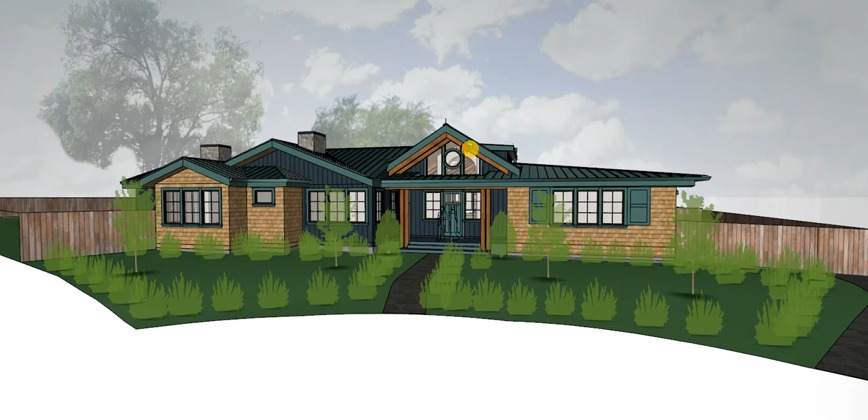Hey guys, thanks for the great meeting just now and for the meeting that we had last week to go over your feedback on those initial massing studies. I'm really happy with this latest iteration of study 5 that you liked, the one that had the steeply pitched gable, not quite the A-frame, steeply pitched gable taller than 18 feet. So yes, this will trigger a planning commission review, but so be it. I think it's a very attractive design. I hope the planning department will appreciate it as much as I do, and as much as I hope you guys do. So what we're looking at here is a simplified version of what we had before.

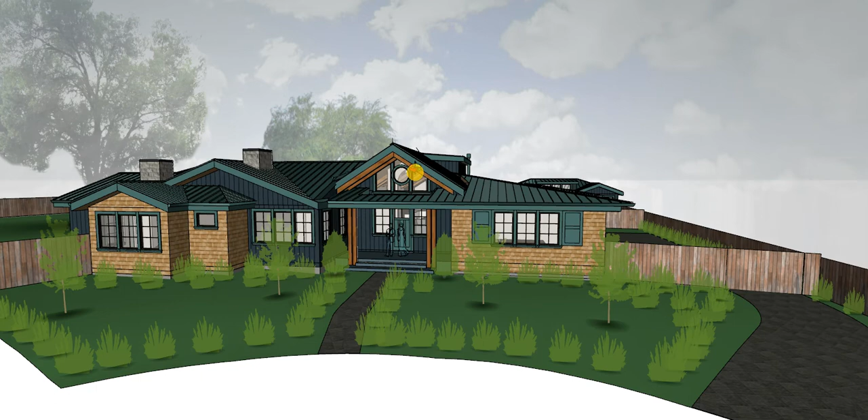So instead of there being 6 different gable dormers for the great room, 3 on each side of the main ridge, we're now looking at just a simple shed dormer on both sides with 4 clerestory windows high up, bringing a lot of light into the middle of the great room, at the dining area and the edge of the seating area. I really like this. I think it's pretty handsome, but we did have to lower the height a little bit to account for the taller than 15-foot interior height double count that we're going to have to do for certain areas of this great room. But I still think it's attractive.

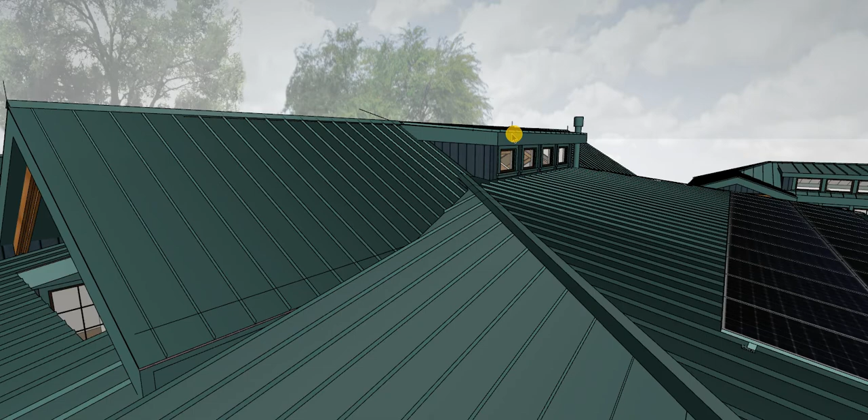We're looking at a mix of roof slopes here of 7.5 and 12, 4.5 and 12, and 2 and 12, with a little bit of 1 and 12 thrown into the mix too. That 1 and 12 here is just to make sure that we have enough wall height to fit an attractive looking transom in without interfering with the 2 and 12 main slope here. This could be played around with a little bit. This could be flattened a little bit more too.

In fact, maybe going with a flatter 1 or 1.5 and 12 roof pitch for the garage would help minimize or mitigate the penalty we're going to have for tilting towards the north on the solar panel right here. That's probably something I could continue to iterate on. Regardless, though, I'm still really happy with the overall look, and those are the main pitches that we're using, the roof pitches. Let's see here.

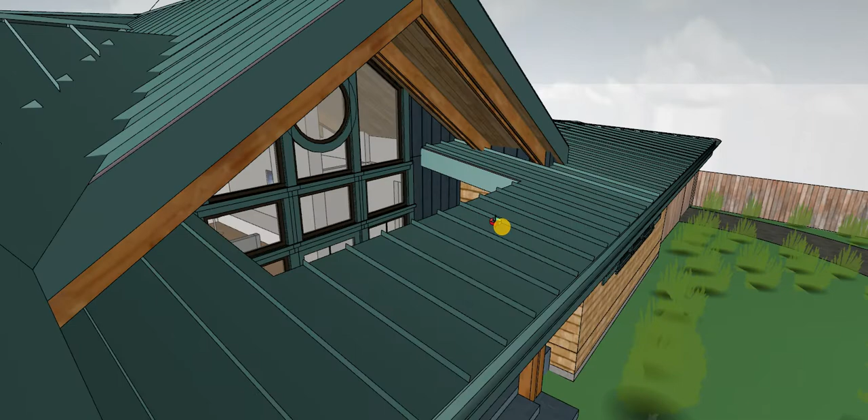There is the cutout at the front porch, which allows for this repeated motif of a window design without being interrupted by the roof plane. And I think this looks great as you're coming in. And you look up through this opening, you start to see the wood ceiling that's a part of the great room. And if we go through the door, and we're in the great room, and we look back, I think it's still appreciated even here as well.

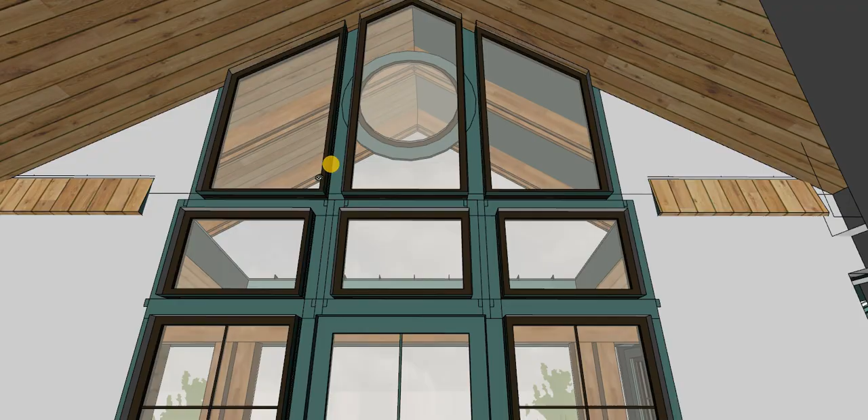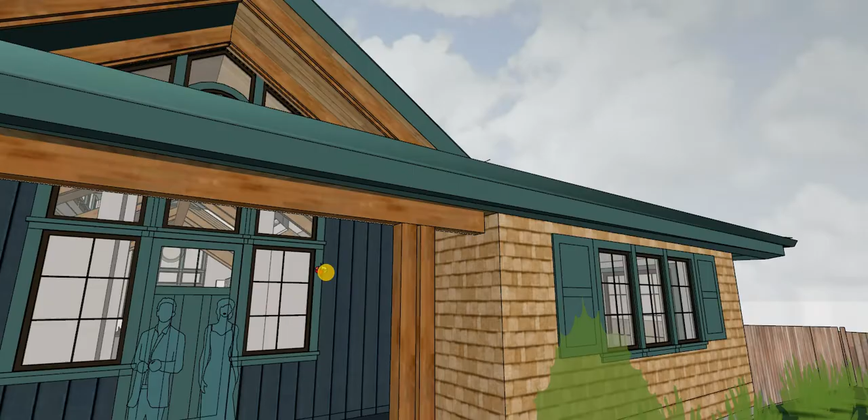When you're walking towards your front door, and you look up through this opening, through this area that's still protected. The roof overhang's still coming up over here. But I think that's really, really nice. A nice special treatment there. And why do we still want this roof here? This is to help tie in with the neighborhood. Your neighborhood is predominantly these long linear eave lines.

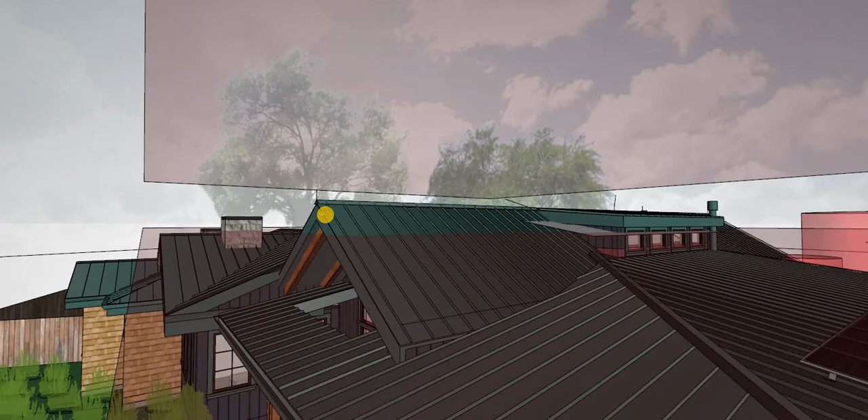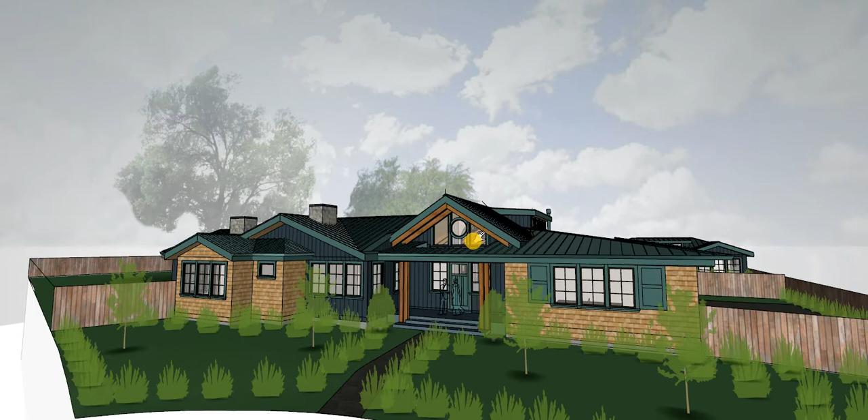I think this is a really important line to incorporate into your home design to help mitigate the added height here. We go 2.5 feet above this 18-foot height limit. That's what's going to trigger the Planning Commission review. But I think by bringing it back so far and having this long, low roof line soften this will help a lot. Plus we're, I think, offering a very special view here.

This interior wall, this gray element, it's just a placeholder for now, but I do think this could be expressed very, very specially, very beautifully. But we'll play on that while the Planning Commission review is underway, rather than focusing on that element, because the planning department's not going to care what happens on the inside. Even though it would be visible, it's really not part of their purview. They're going to be talking more about, is this massive element looming over any of your neighbors? And no, I don't think that's the case for us.

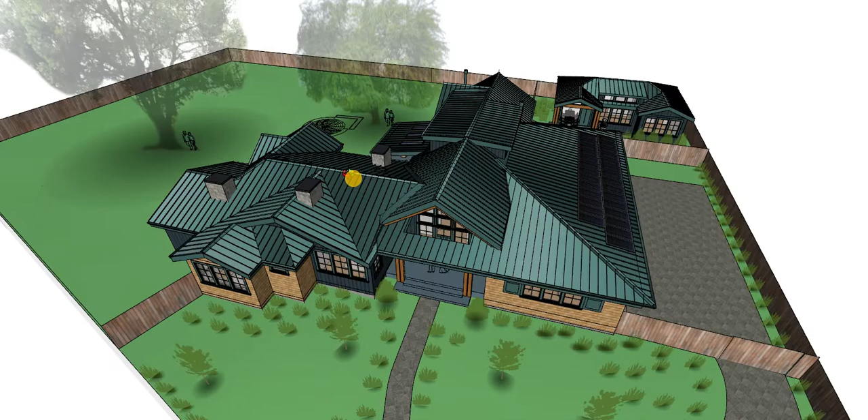As we turn the corner here, we're seeing that we've got a very limited material palette. We're really just talking about metal roofing for the entire house. It's a very clean roof. There are a lot of roof planes, but I've combined as many as I could logically and practically. I'll be happy to review that with you in more detail if you'd like. The wall palette is really, I think, just two materials. Just the shingle siding and the board and batten siding, painted black. So no more mixes of black and blue, now it's just black.

Vertical board and batten siding made out of fiber cement, and a similar fiber cement, but a shingle siding, and more of a warmer tone wood look. So one of the things I tried to do is with every elevation, I wanted the elevation to be bookended by low elements like the bedroom wing or the flex room wing, these low elements in the stain grade material

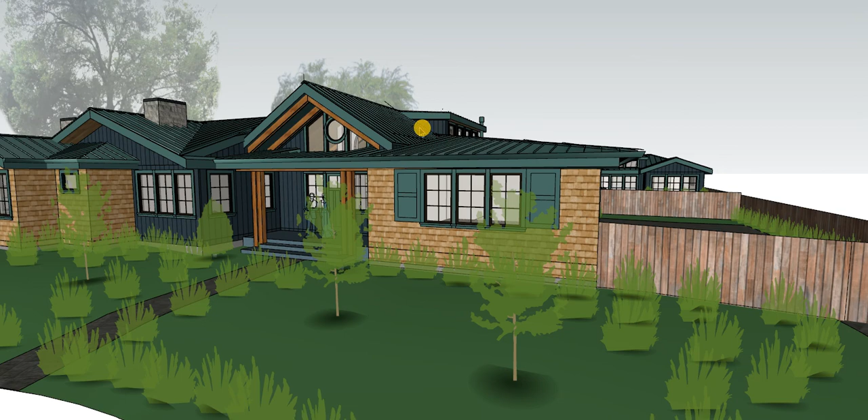that has more texture to it, and you can get up closer to it. Whereas the elements that are far away or tall, or that I want to recede from the eye line a little bit, like the shed dormer siding or the tall wall of the great room, that is meant to be the darker black painted fiber cement material that draws more attention to these lower elements.

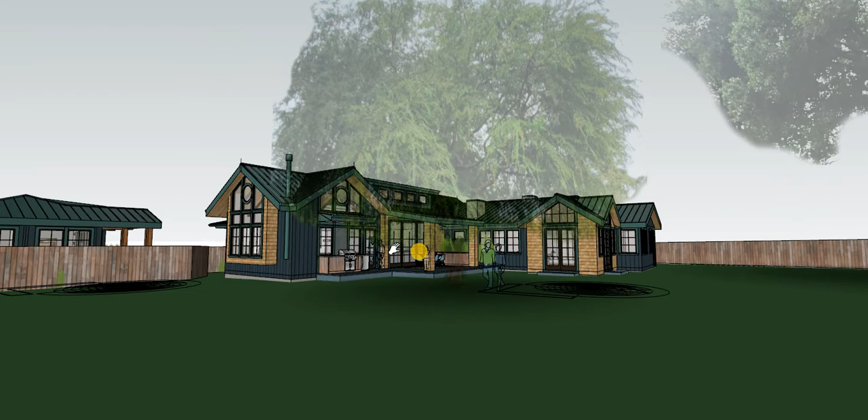So that's sort of the appeal happening at every elevation, being bookended, I should say, by lower elements or smaller elements of the shingle siding. So that's sort of a repeated motif that I've relied on for how I've applied the materials.

So as we turn the corner here for the garage, ignore this line for now. I've said, hey, I want the doors to be centered on the wall in this flex room, and I want the doors to be looking like they're supposed to be centered on something. So let's make sure that the material change happens here, even though there's no change in the wall plane here. We've changed the material. Now this door appears centered from the exterior as well. And this door grouping also appears centered within these bands of fiber cement siding in this case.

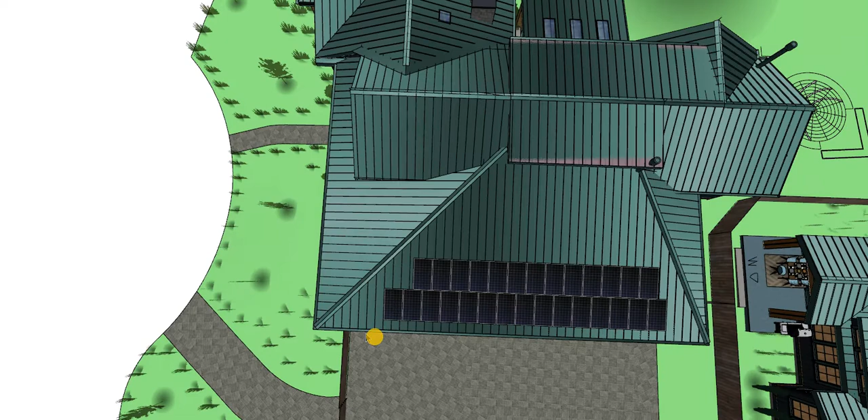So one interesting thing I did here with the roof slopes is these two roof planes slope 2 and 12 and create a 45-degree hip line. This roof plane, though, I didn't want to slope that back at 2 and 12 again, because the 45-degree roof plane kind of comes to a bit of a point right here, and I didn't feel that was very attractive.

So I said, well, let's try the same 4.5 and 12 roof slope I'm using on the bedroom here, and lo and behold, that lands us perfectly in line with the width of the shed dormer for those 4 windows. I'm like, oh, that's kind of fortuitous. I think that's kind of perfect. I think it looks pretty attractive to sort of be the end cap for the mudroom here.

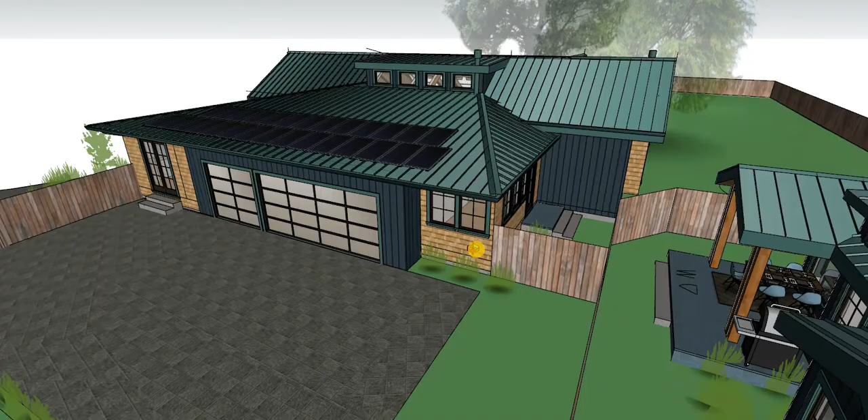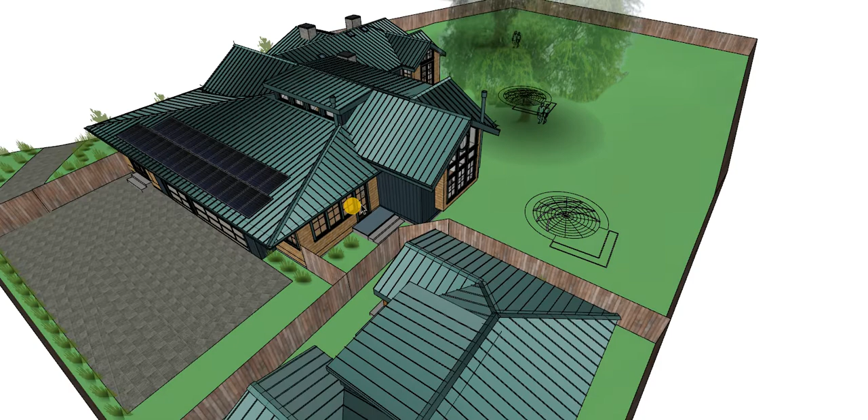You're seeing the ADU now mocked up as well. I'm showing some idea for what fences could be like if you ever wanted to rent out the ADU, but partition more of the fence area for yourself. So there'd be a gate here so you could get into your mudroom yard with access through this little kitty corner or chamfered cut right there to get past the corner of the great room into the backyard area.

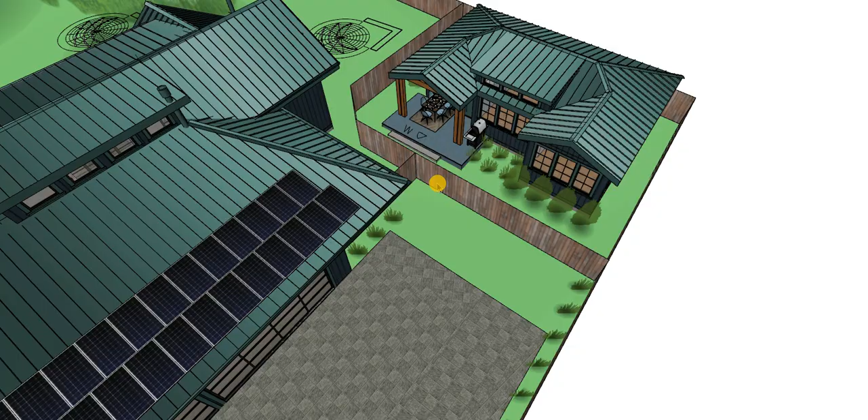But this leaves some side area for the ADU. They would access their ADU through a gate right here perhaps, and then open right into their door. But I don't think you're going to want to have that fence built right away, so it's going to feel more open like this. So let's take a look at it like that instead. I think the ADU looks nice.

We asked in the meeting whether or not this height increase with this shed dormer was necessary. Certainly not necessary, but I do think it's a nice tie-in with what's happening at the great room for the main house. And so I'd say, yeah, let's go for it. Yeah, it's 3 more windows. There's costs for the windows and the installation and flashing of them, but it's a nominal increase for, I think, a lot of added benefit.

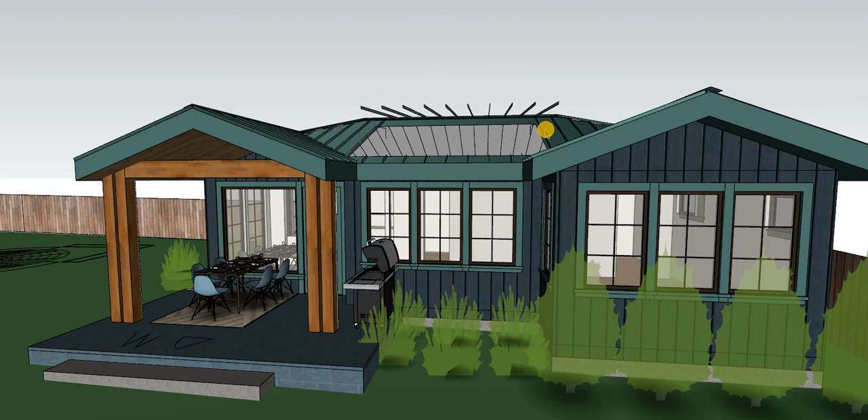Without it, it's okay. You can imagine what that'd be like closed in. It's a bit too plain. I like the balance. I like seeing these 2 gables with this element in the center, and then dressing up this gable with the posts to draw the eye this way to say, yeah, this is where the entrance is for the ADU.

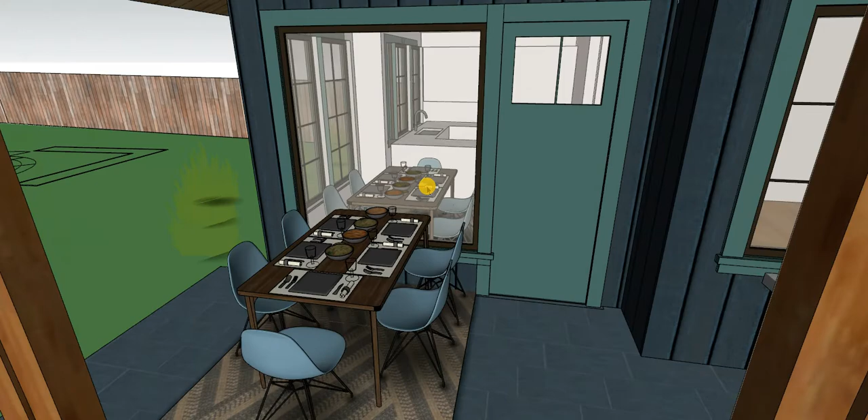I'm really interested to hear your thoughts on how successful you think this feels as just a furniture element. I mean, certainly we could do some built-in benches around this tall, large, fixed window to create that indoor-outdoor feel and that really awesome inspiration image you shared. But I think starting off as furniture pieces does seem to work, in my opinion.

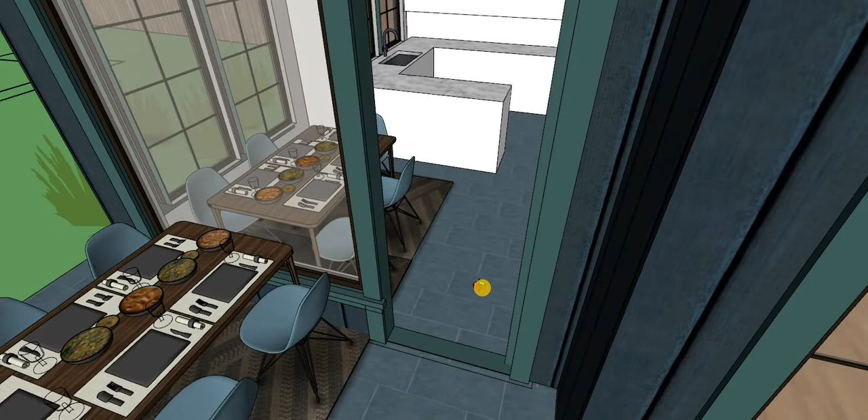Especially since I changed the way the doors open. So now we'll see the door swing open this way into this furniture zone, into this empty area. And this would be the entry area. So we come in, we're blocked from the family room a little bit, not much, the living room a little bit. But I think that's the way to do it.

That way also, if you're having the party here, you can leave this door open. And now you've got sort of a conversation zone. This could be a double casement that would open up as well to create a very large air opening with really just one piece of glass separating you guys from what is otherwise very open air.

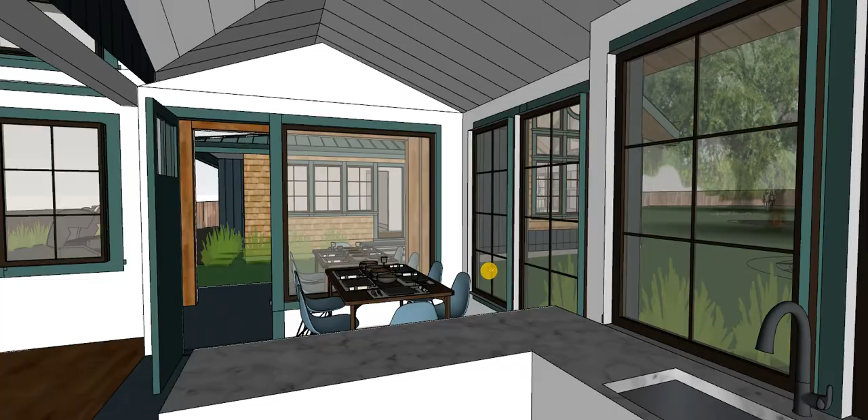Let's get to the door here. So I've stuck with the bay window pop-out happening at the kitchen sink, but I've taken that all the way up to the roof. And to be honest, this is the first place I developed the design. This is where I created the motif.

And then again, just like I did with the A-frame house I was going on and on about last week, I copied that design and the roof form onto the cooktop wall, and then just modified it slightly to make the cooktop wall work while still allowing and celebrating the amazing view and connection to this mature elm tree. You're gonna be right under that canopy. I'm so excited about this, and it works really well. It works really well as an outdoor cook area as well.

Blocking off this ribbon of windows here at the cooktop side allows for there to be a little low cover element for the outdoor kitchen, which I think is cute. It's not necessary, but it's cute. I don't think you need to worry about mechanically ventilating this cooktop. You don't need to incorporate a hood here, but you could if you wanted to. There's so much open air here, I don't even think that would be necessary, so don't worry about that. But lighting, puck lights, heck yeah. We'll put a couple puck lights, maybe 3 in here, to light up your outdoor kitchen area.

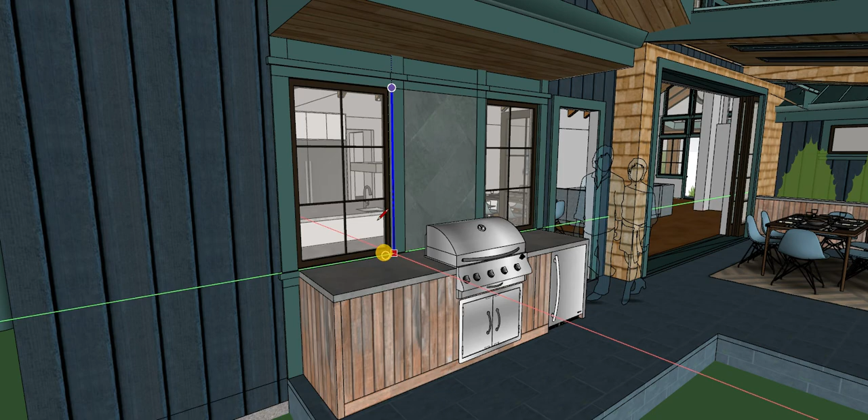Your outdoor kitchen now with casement windows, maybe awning windows? We should think about how we want these windows to operate so that you don't have to worry about clearing the countertop on either side to operate the window. Oh look, it'd be really nice if awning windows could be this big. I don't think it can. I think it's too tall to be an awning window without being super special. 5x3 is the standard window size I'm showing around your house. Typically, I know that's fine as a casement.

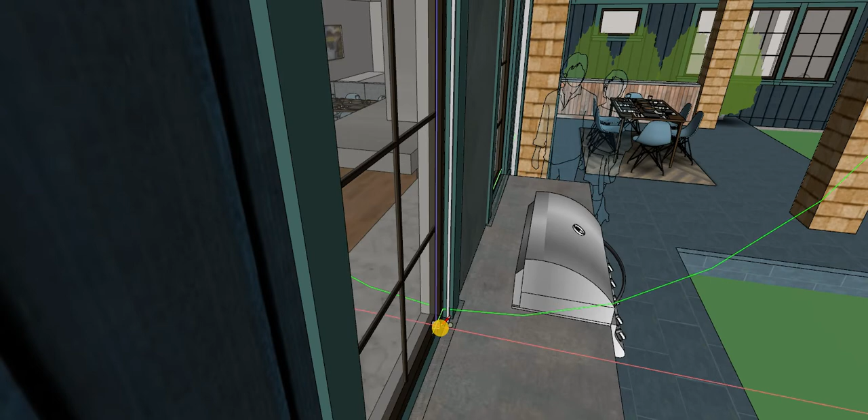I'll double check awning. Either way though, even if it opened up as an awning, we'd have to clear the countertop area here in order to avoid elements being struck in the swing here. If worse came to worse, we could always subdivide this window into a fixed lower panel, and this upper panel could be an awning. Easy peasy. All right. From the inside, I think it's fantastic as well.

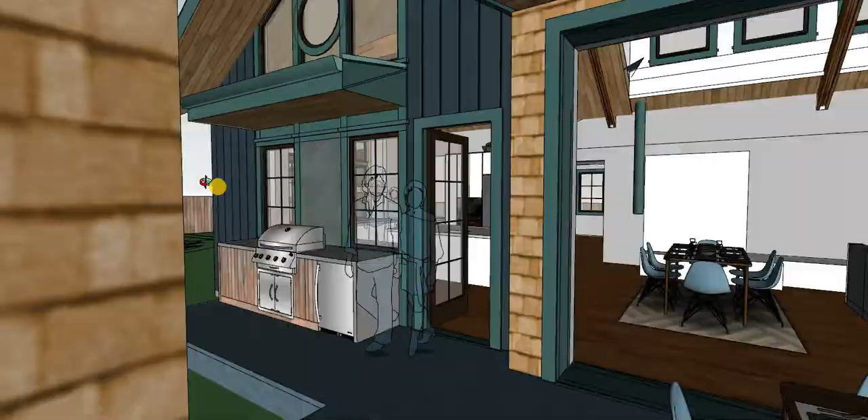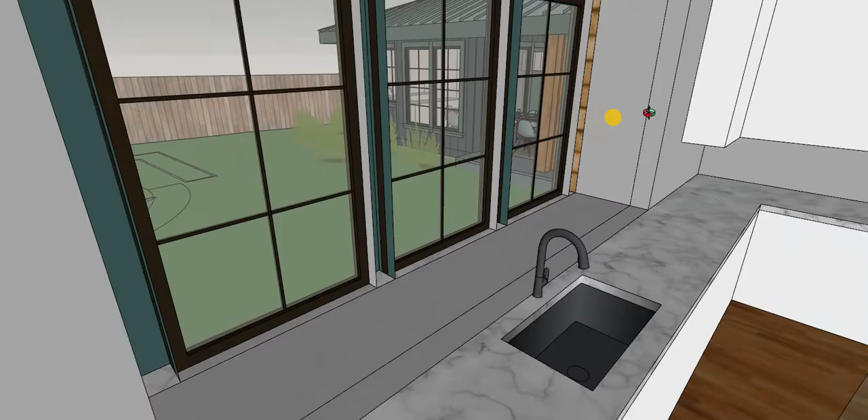Celebrating the view of that tree is something I'm so very excited about. I think your landscape architects should be tasked with putting something special right out here at the property line. Something very special to celebrate at the end here. I know you guys have a strong desire for a garden here. I hope some space can be reserved for a special plant, a tree perhaps, that would be a very great focal point both for the main house great room kitchen, as well as the ADU kitchen.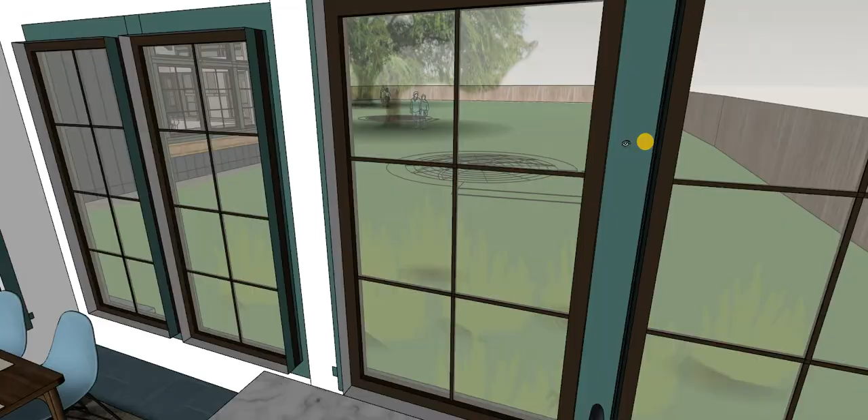I think the ADU kitchen would benefit from seeing something nice in the foreground here as well, although there's a fantastic view of both the elm and the oak tree. This is such a great placement. I'm so very happy with this. Oops, we're underground.

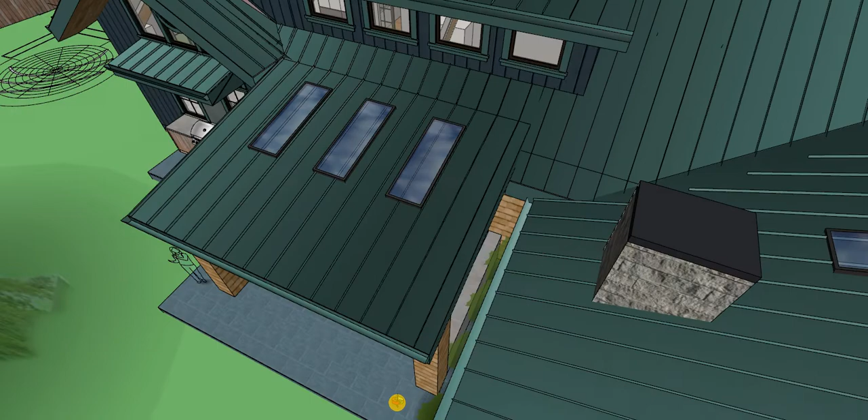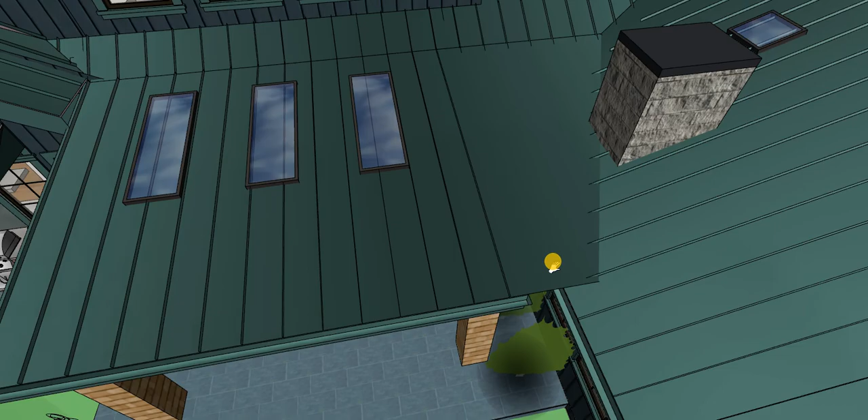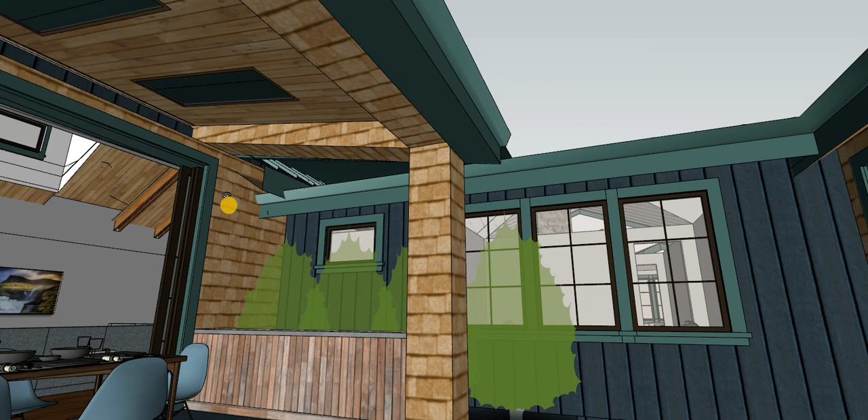We looked at whether or not the covered porch wants to just connect over to the other roof here, and just to quickly mock that up again, while I think it's certainly possible to do this, to close that off, I would just say it's a shame not to have even that little bit of light coming in this way. It's not much. I mean, certainly we're not hurting for natural light here. But I'm just not sure what's really gained by closing this in, other than not having to do another screen, which perhaps doesn't even ever need to be a motorized drop-down screen. This could just be a fixed screen element above this.

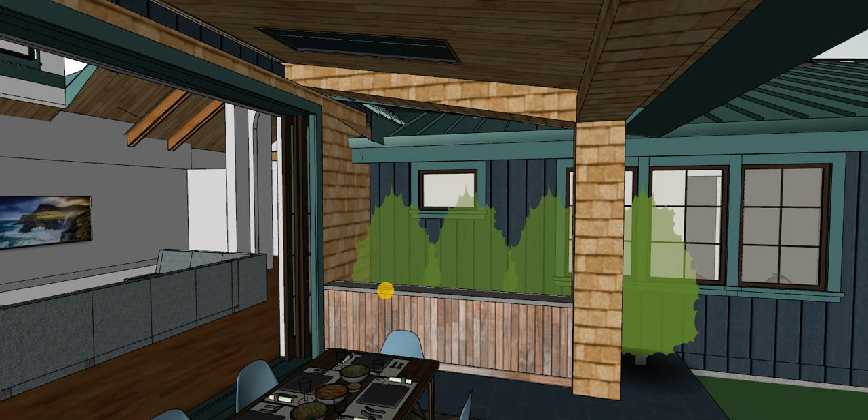It could even be a trellis element, a steel grow medium for some vining plants, like maybe a bougainvillea or a jasmine that is shade tolerant. Could grow up and create sort of a green screen element, but that wouldn't work for your bugs. Never mind, scratch that. That's terrible. It's got to be a screen. Just a solid screen for you guys. But it doesn't have to be motorized, if that's a concern.

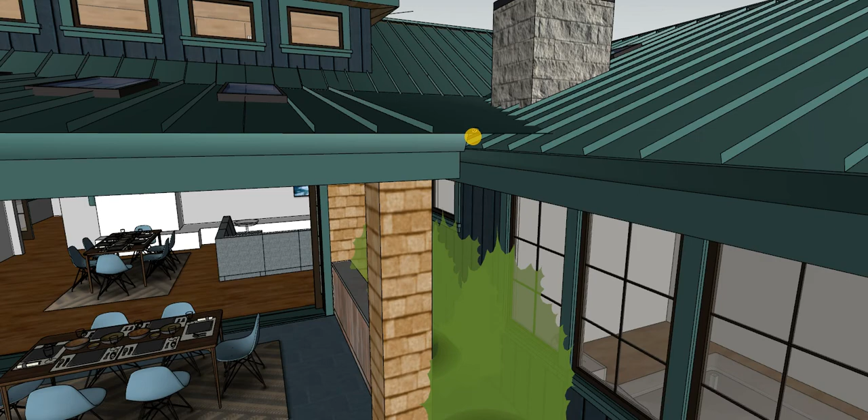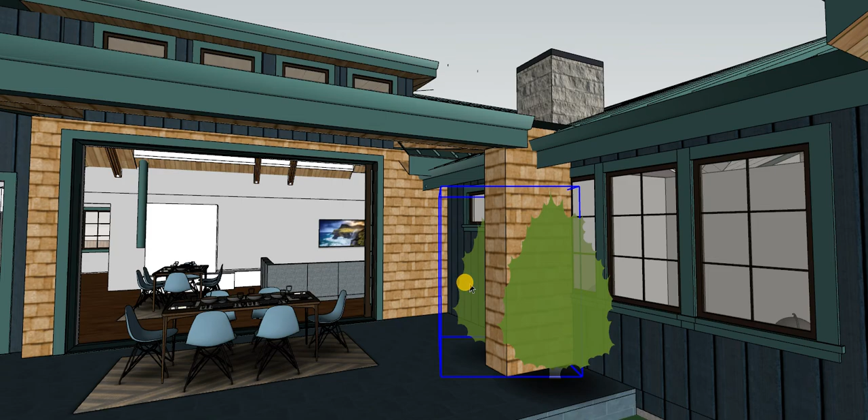Versus closing this element in here and bringing this wall element, more or less taking this element to the wall in order for there to be something for that screen to die against. And you can get rid of this element, get rid of the plants. You could fill this in, so this could still be an area where you have a bit of cabinetry at the end.

That houses elements for outdoor dining. This would be a great place for that. But that's what the intent was with that other narrow element that I had here. This element here. That was the intent there. So that could still persist in this design. I don't know, maybe this is okay.

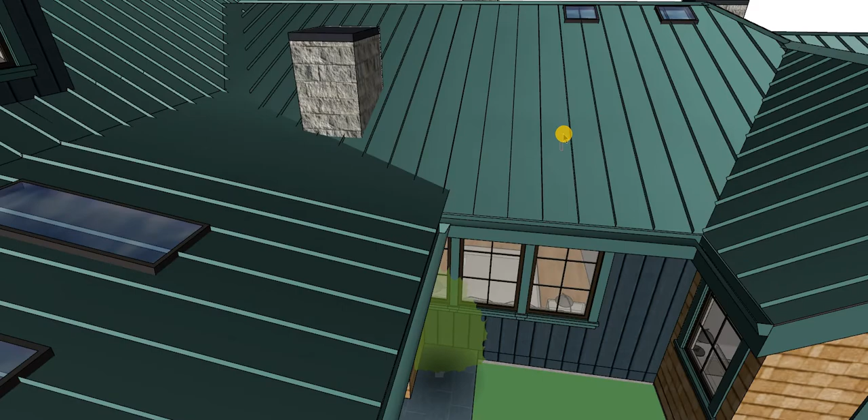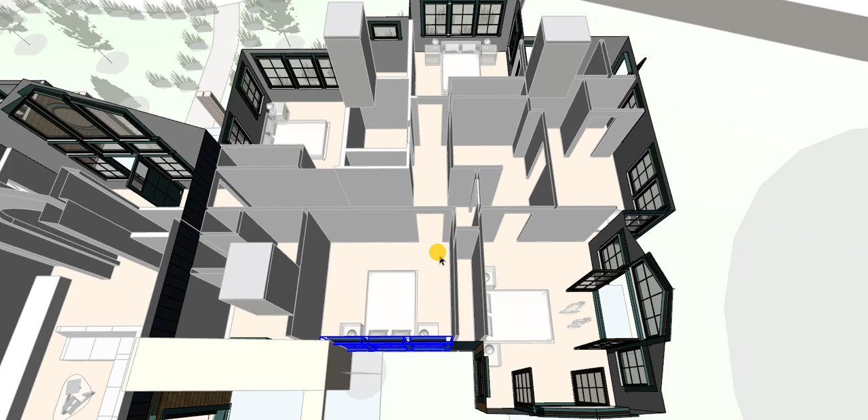Then for these windows here, for this bedroom, maybe what we do is we just say, hey, we're not going to center the windows on the wall. We're going to bias them all the way over here to be in line with the door, so that if this room is ever empty and becomes a space or the door's ever open, coming through the hall, looking through this door into the bedroom, out this window would be really nice. You'll see through all these windows, of course. But I think if we take this element to the wall, we're going to lose a window. That's okay.

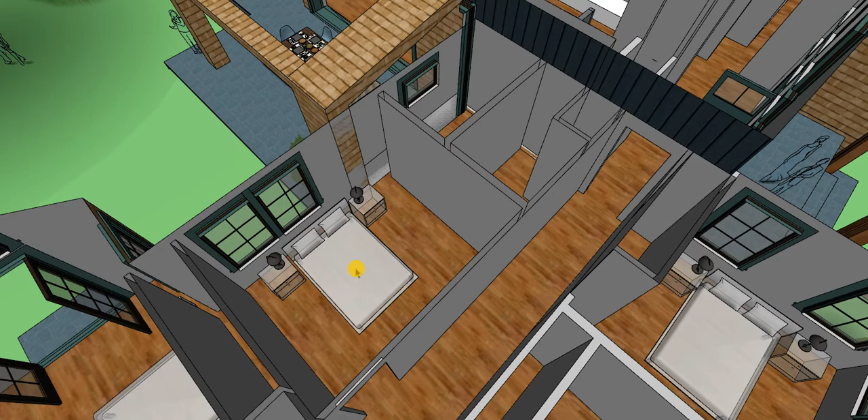This is the door to this bedroom's bathroom, so we don't really want to necessarily rotate the bed. I don't want the bed to be on this wall, for example. Certainly it's a nicer view from bed, but I feel like that's the wrong way to enter a room, against the side of a bed there. That's just my personal opinion though. I do feel like this wants to be the bed wall. And then does it feel a little odd where these windows are placed? Maybe we try to maintain one centered in the room, another one flanking it. I don't know.

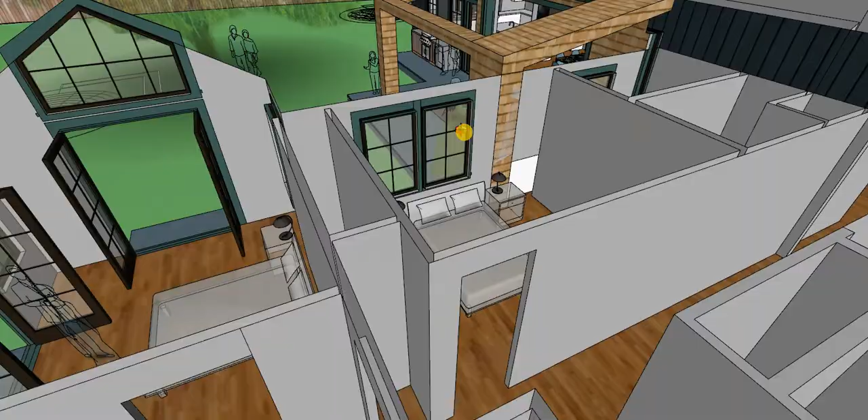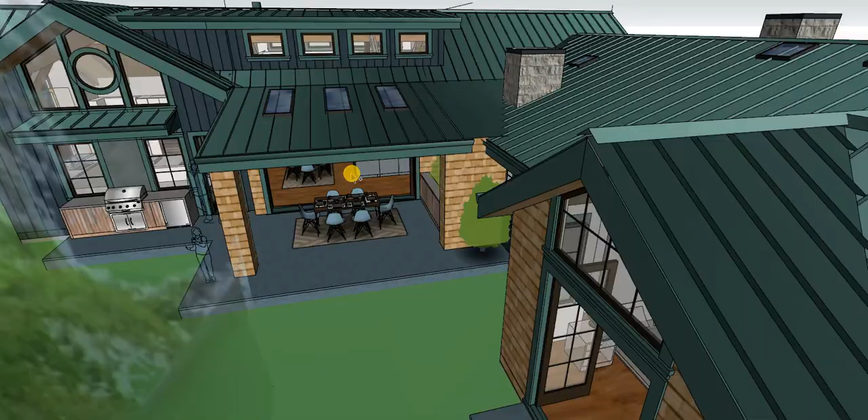It's my personal opinion. It's better to go with the open air space there. To let this be open air. Let these two roofs collide as they will, let their gutters interact here. Keep this as just a simple shed roof with its one gutter at the end here, and then just close this off with one more drop-down curtain or fixed screen, and let these two just be the roll-up kind.

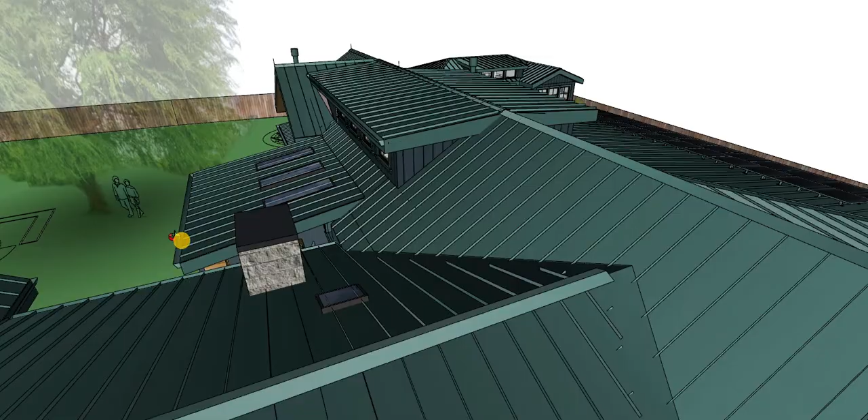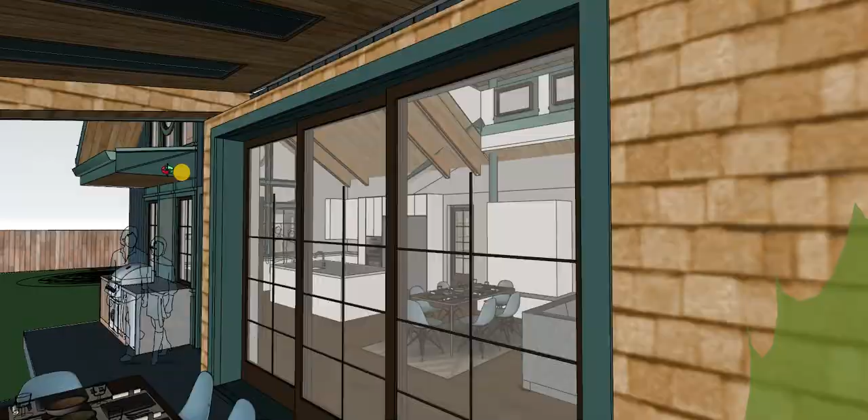One thing worth noting here, looking at this with fresh eyes, I wanted to stretch this shed dormer out to be a little bit larger so that it was meeting this line as well, rather than just being this minimal 4-window element. But I think it might relate better to the doors here. Remember I've stretched these up now from 8 feet up to 10 feet. I don't know. I'm not quite convinced I've got this finalized yet. I want to study this shed a little bit more, how this window array relates to this door. They are in separate planes. The wall for the doors is inset from the wall of this shed by about 18 inches. So they don't have to be exactly the same, but I don't know.

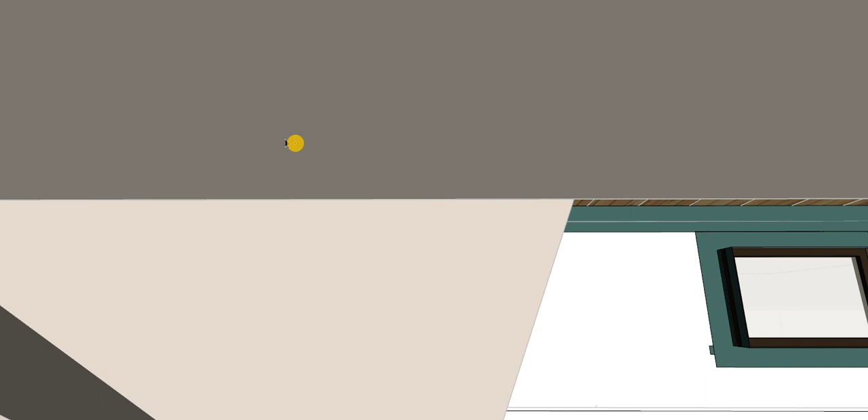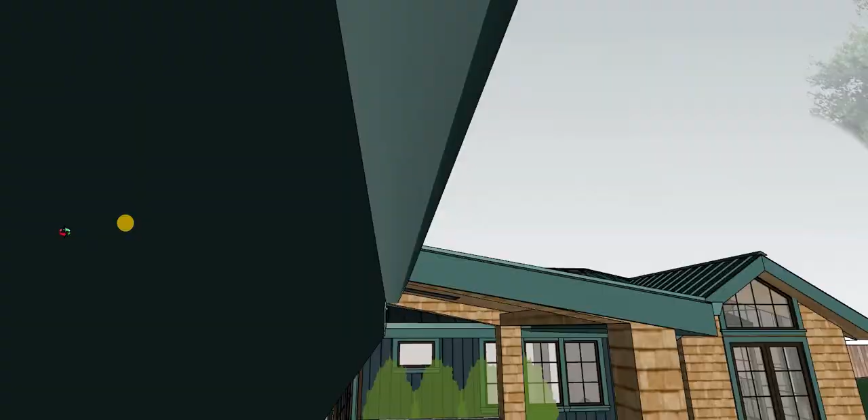Looking at this with fresh eyes again, I think we probably want to see this one go and make these remaining 3 read centered to that. We should then shrink this element up. Excuse me, bear with me. Oh no, am I lost? No, okay. We should shrink this element up by an equivalent amount. Certainly not that much though. Say something like that, okay. Some fixing needs to be done, but I think that's probably better. I can live with that.

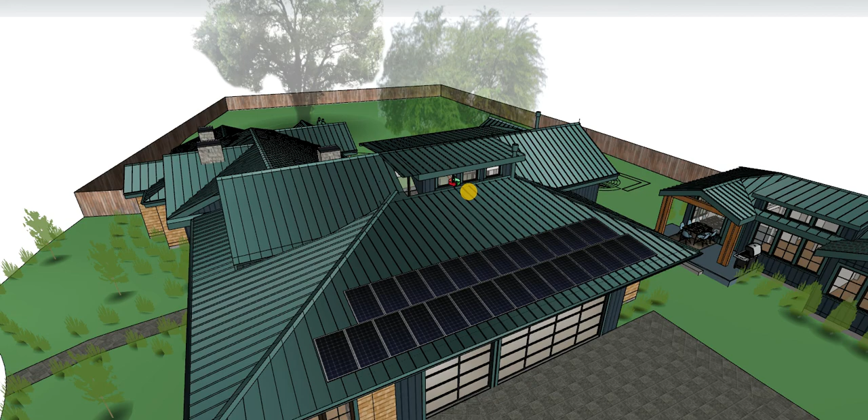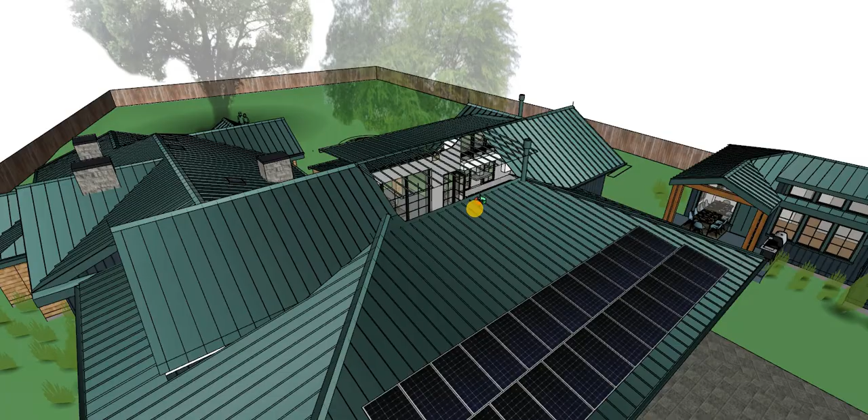This shed dormer on this side is not strictly necessary. We could omit this element and just keep this closed. That might be simpler, all things considered. But I did want to at least start and try by having it be a bit more symmetrical when we first enter that room.

And I think looking up and seeing the 3 windows spaced related to the 3 pocket doors that'll slide over into this pocket here. And then seeing the 3 skylights right there, which are not cutting through that topmost roof plane yet, and looking back and seeing the same 3 here, and maybe the fireplace now takes on a relationship with this leftmost window. I could see that starting to make sense.

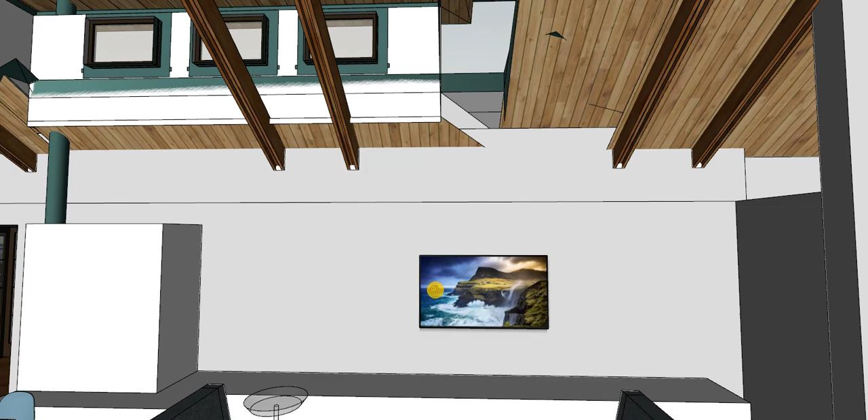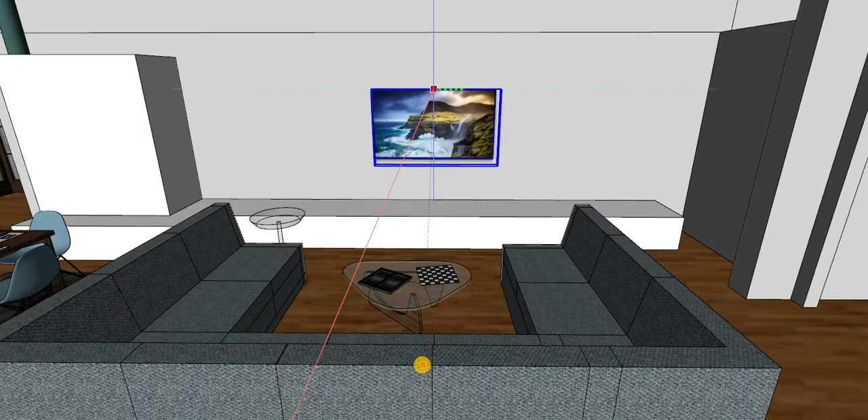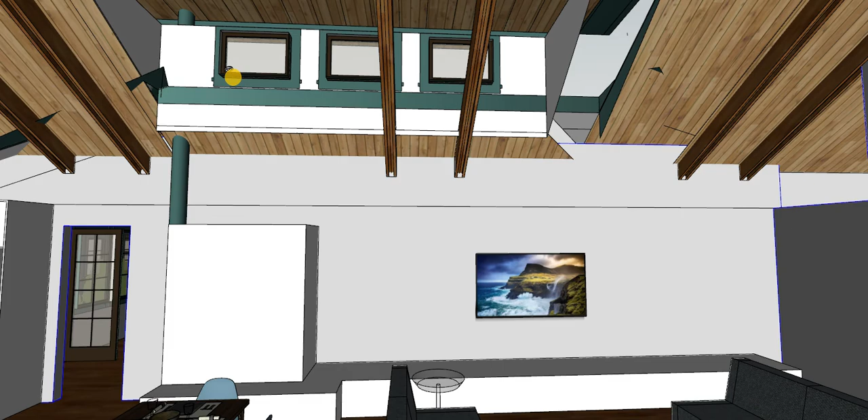And it even gives the TV now, this all has to stretch over, but this gives the TV now a little bit more flexibility maybe, or freedom to scoot over a bit, to maybe be on an edge. I don't know, it still wants to be centered on the furniture. In fact, I should probably show that as such right now. Oh my, how much stuff do I have to go through right now? Bear with me, here we go. I don't know. Might have to look at how the TV and the fireplace relate to this shed dormer above. That might be a dictating element. We'll have to see.

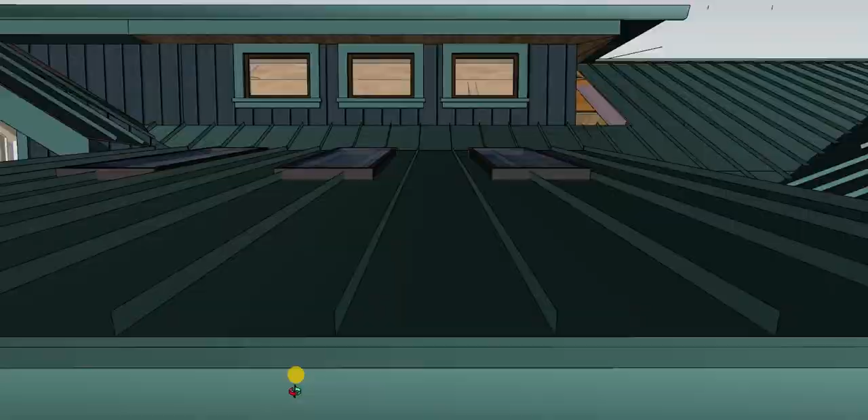Tell you what, I'm going to undo that change just so you can see the cleaner version with the 4 for now. So let's go back to where we were. This will be the version that I'll share with you that you can take a look at. So here's the master bedroom here.

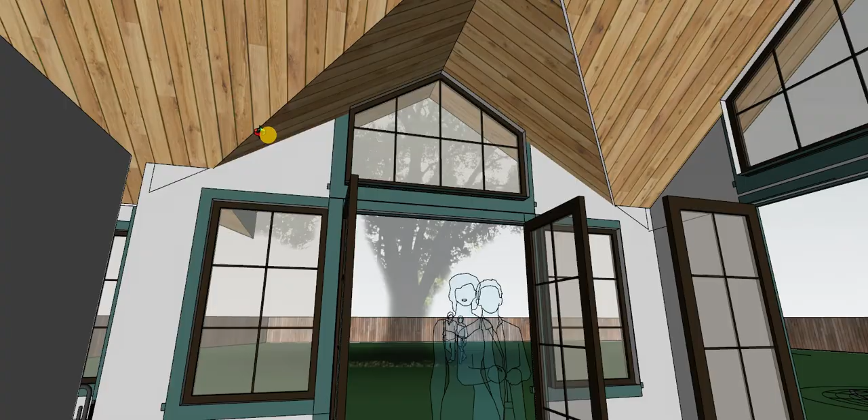Super happy with this. Tons of light, great views when you come in through the master vestibule. Oops, so the door's open. There we go. I'm really quite happy with this. We could make some minor adjustments, of course.

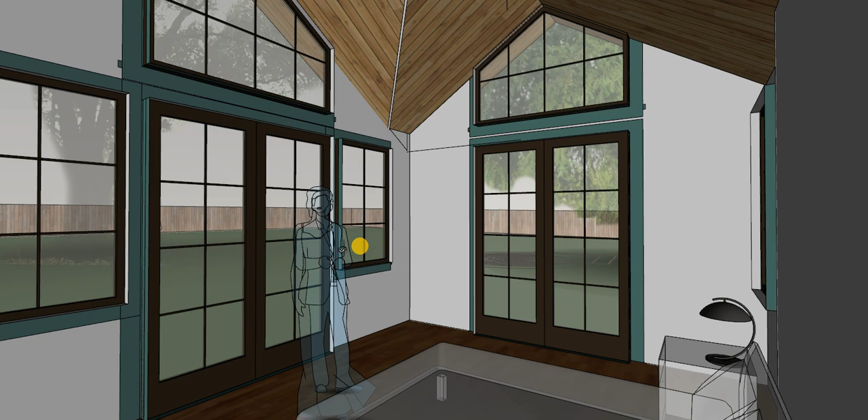Like I talked about, maybe we don't need both sets of doors here. That might be a bit too much. Maybe we do want to change one set to be just windows raised above dresser height. I'd certainly be okay with that. Although I do envision dressers could fit here nicely.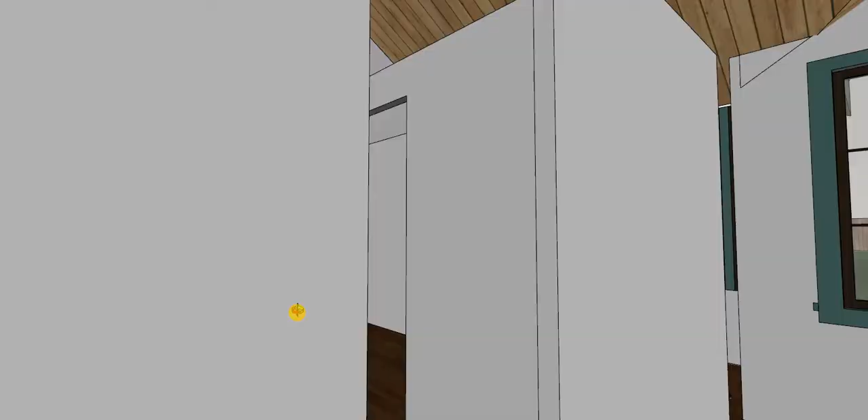One thing I hinted at before was the view at the end of the hallway when we're looking at the tub. If we looked with the original plan, had the door, the pocket door, right here, looking right on the tub. So if we were to mock that up, it'd be more or less something like this. This isn't perfect, but we would see something like that from the end of the hallway.

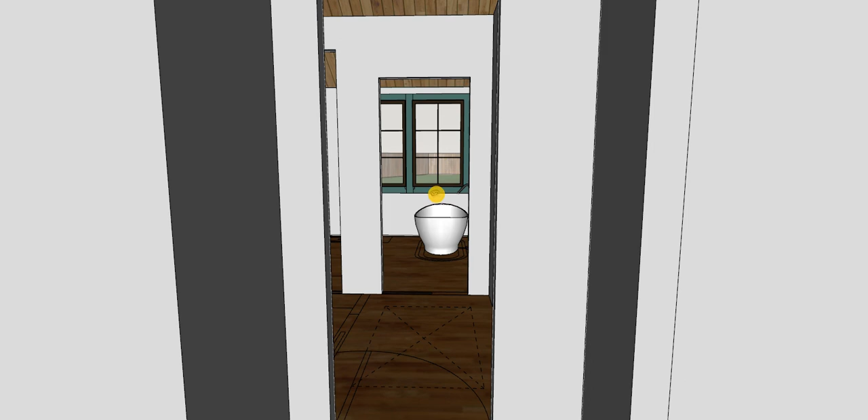And I don't know about you, but I can't recommend that to you without you telling me that you're really A-okay with seeing your tub. And I love seeing the window, but I wouldn't want to see the tub when this door into your master vestibule is in the open position.

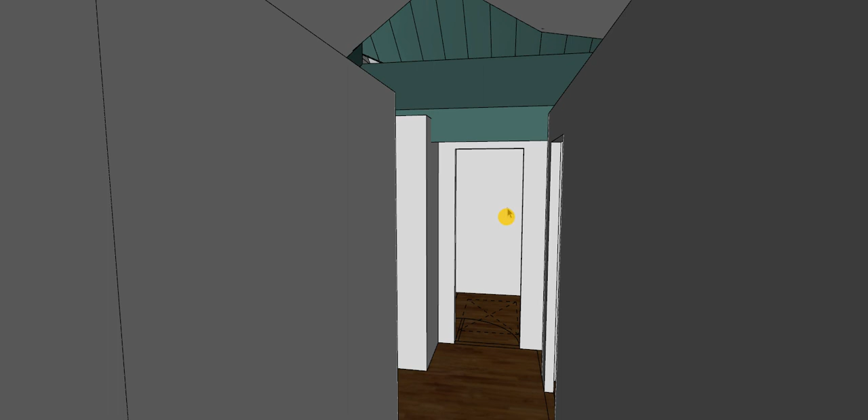Now, if we get rid of that opening, or again, if we shift it over, like I'm doing here, now we can put a large mirror, perhaps a little console table under that mirror or artwork on this wall. This room being lit by a skylight above, I think also will just be a nicer end cap than seeing that tub. So let me know what you think about that.

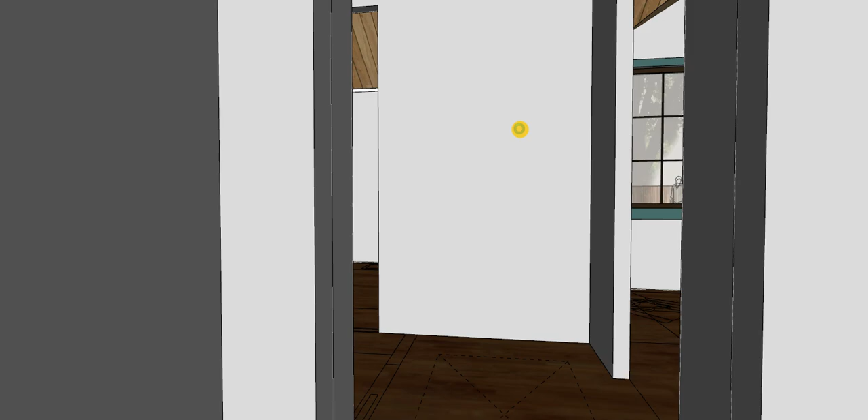If we did want to make that change, we would come in here, see this beautiful mirror, artwork, small table here, lit by a skylight above, and when you come in, we would hang a left, and this would be closed off as a closet, or you would just enter into the closet area that adjoins the master bathroom. So it wouldn't necessarily have to be a closed off closet.

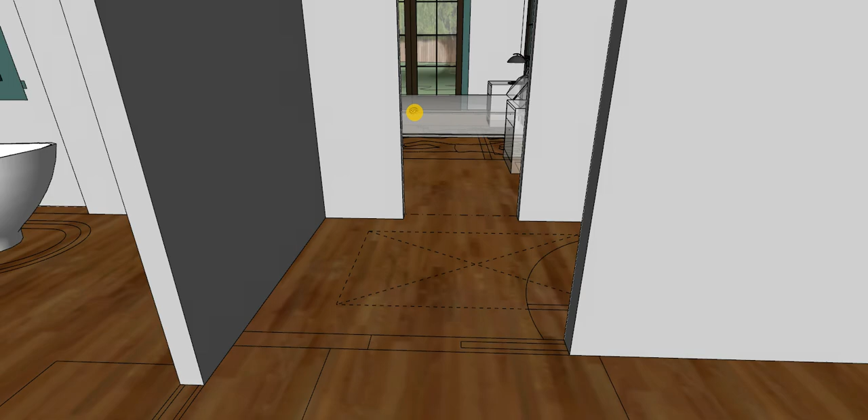It could be an open air closet, but at least it's screened from view a little bit from the bed. Or it could be some nice cabinetry if your budget allows. We should talk about this a bit more. But then when you come in, still there'd be nice cabinetry here, vanity here, the tub now. I mean, once we come in and it's a private view, I think this is fantastic.

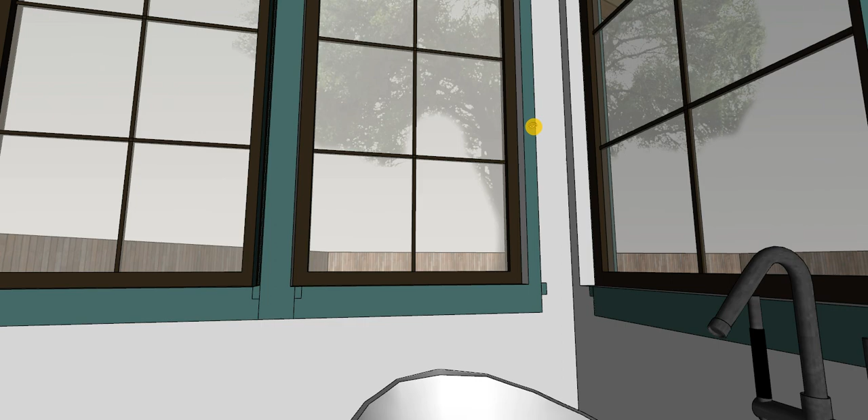I love having the tub here. Don't get me wrong, I think this is such a great spot to take a bath and rest your head back here and look up at that beautiful oak. So this is totally worth keeping, so long as I can make your master closet work to your tastes and preferences. So let's talk about that. There'd be another vanity. Excuse me. The other vanity would go along right here.

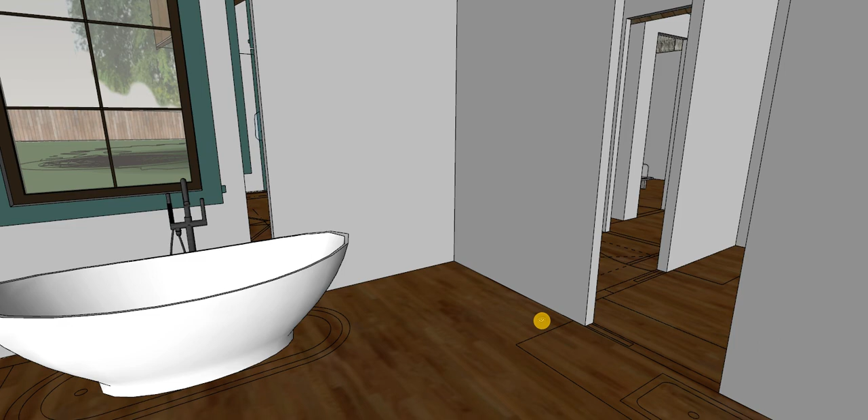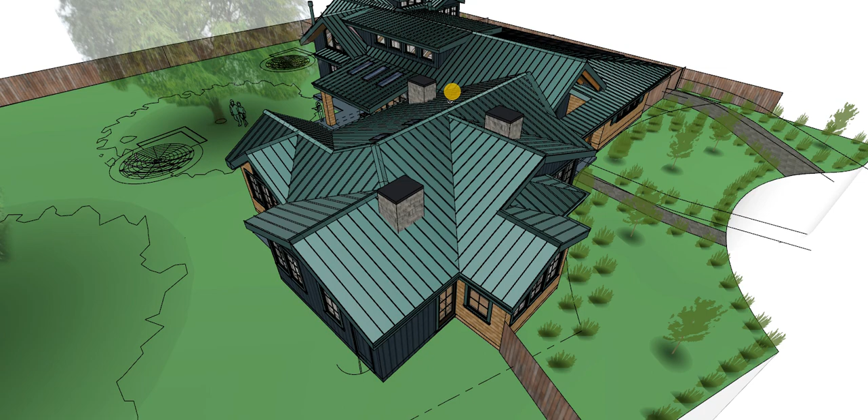All right, but getting back to the exterior, this bedroom wing is pretty simple. We've got a couple chimneys here that are really acting more as plumbing vents. Plumbing vents for your bathrooms and your laundry room. All those plumbing fixtures each have to have a roof penetration.

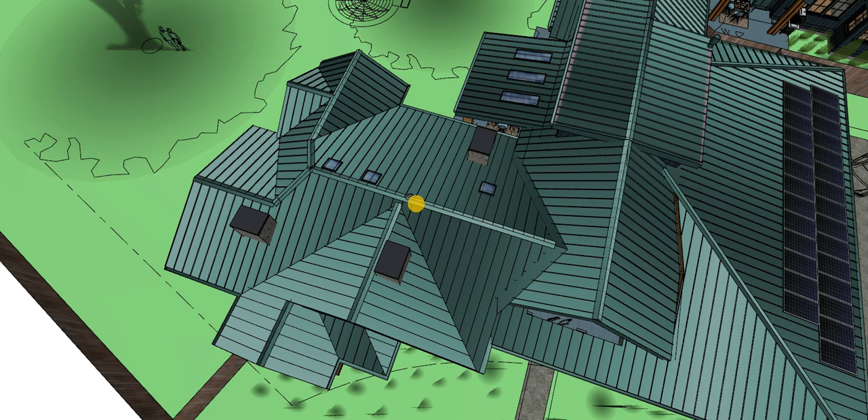I know it was mentioned trying to route them to the back. I think that's a fantastic idea, but in case that doesn't work, it'd be great to encapsulate them in a chimney just directly above where the fixtures are, perhaps. It adds a little bit more interest to the elevation and the front perspective view. But of course, there's a cost for these.

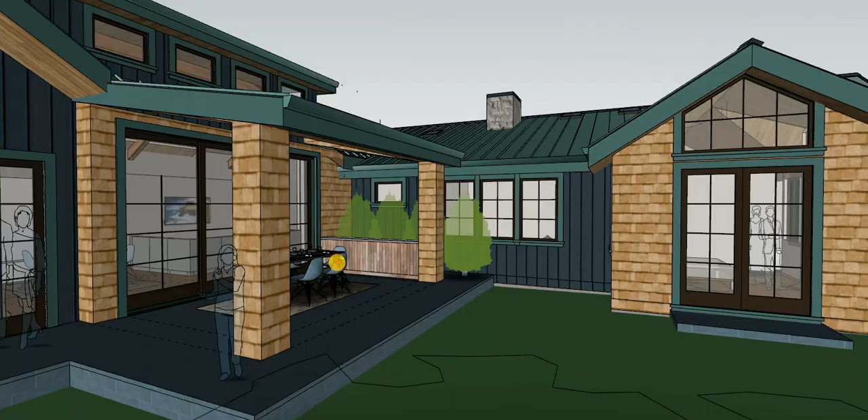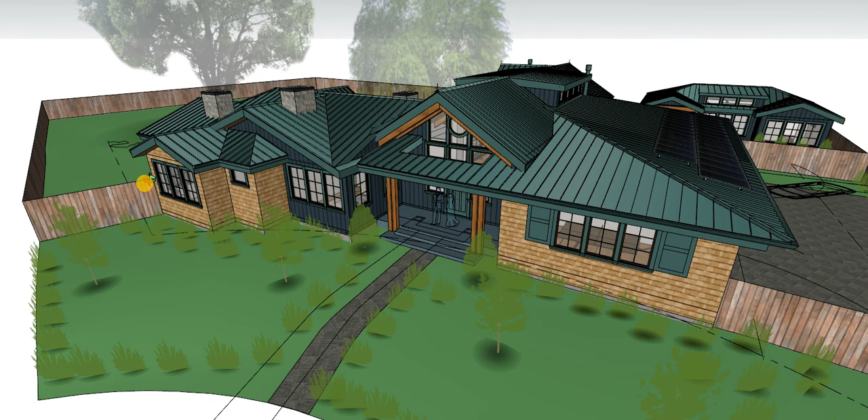If you're paying that cost, do you want to move it to the back, where it's less visible, perhaps? I don't know. That's a finer detail that we can work on together. And I changed the color scheme a little bit again. I was showing more of a blue tone. Now I'm showing a little bit more green, including going with a greenish color roof.

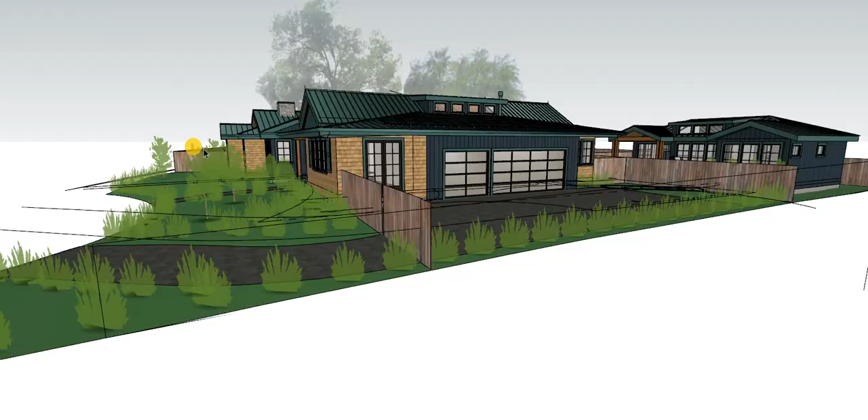That's not my go-to color. I usually go more of a black, but I think for your neighborhood and the images you've shared, this might just suit your color palette. So I'm really curious to hear what you think of this scheme, guys. I'll send you a PDF with some static images as well for you to review.